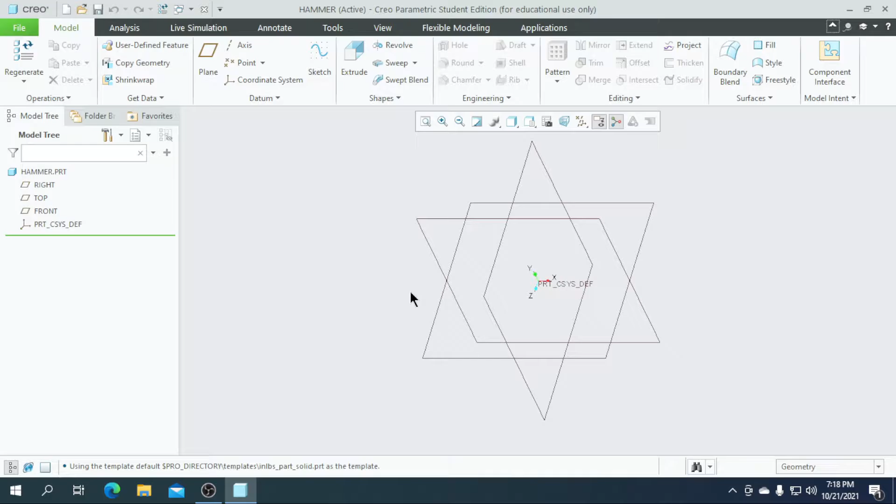So at first select new and enter the file name as hammer. Click OK. So let's go for the front sketch.

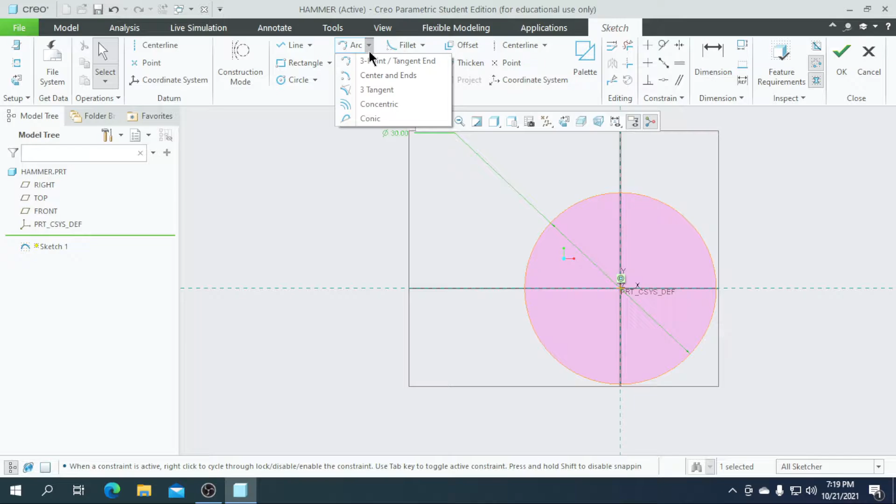At first we need to draw a circle with a diameter of 30. And next we need to draw a 3-point tangent arc from here till here and make it as a tangent.

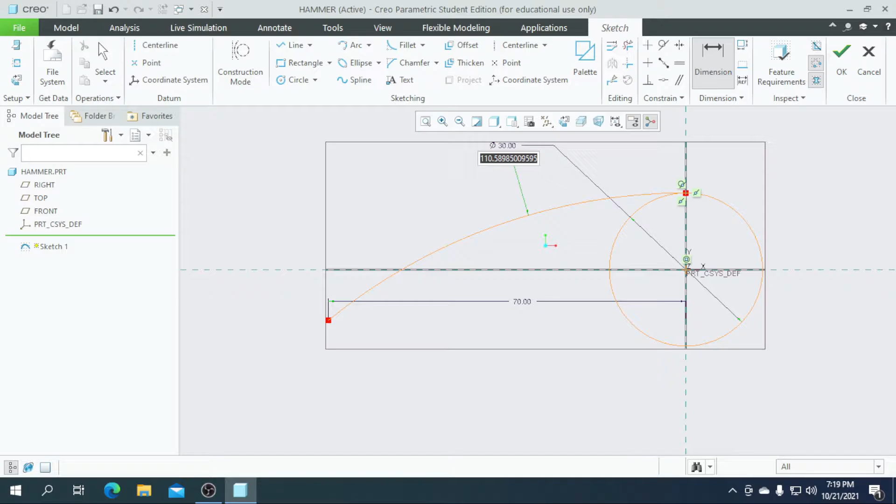Let's go for the dimensions. From this point to this point enter a value of 70. Enter a radius of 189, 185.

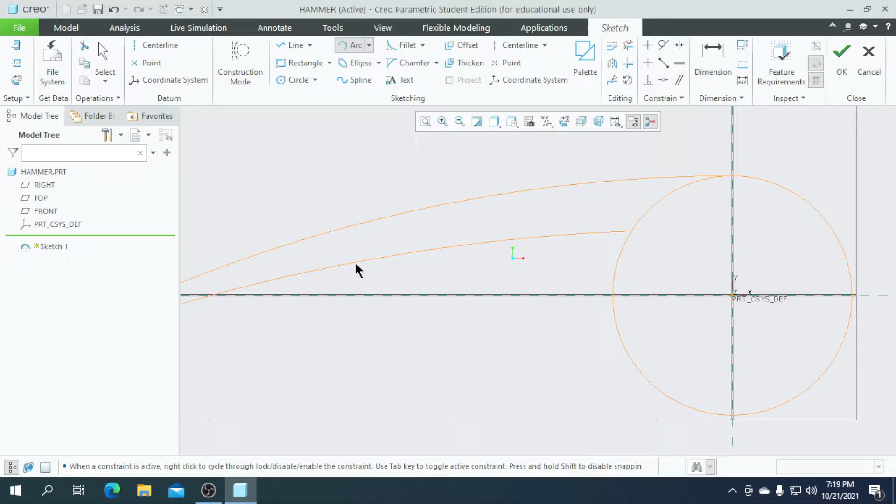So then draw another arc with this reference to this point. Let's go for the dimensions. From this point to this point enter a value of 2, and from this point to this point enter a value of 15.

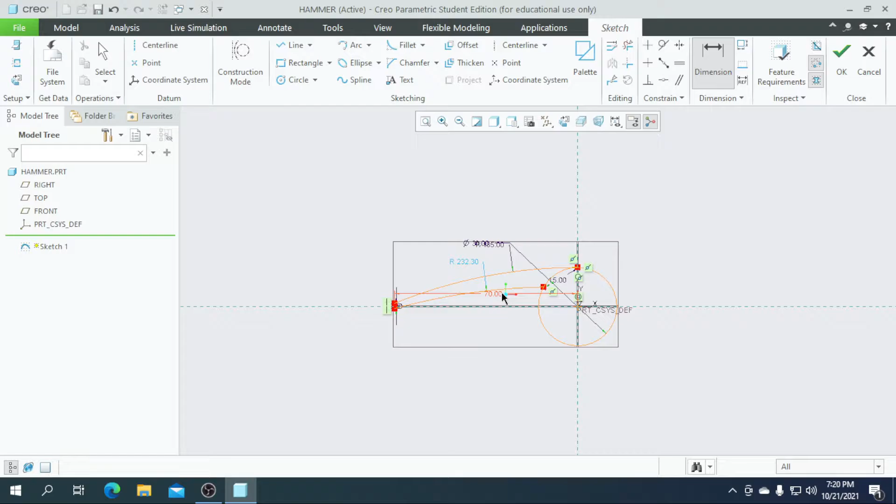So I am drawing this hammer without any dimensions. If you want to draw accurately, you can search for some PDFs. Draw a line. So our part is completed.

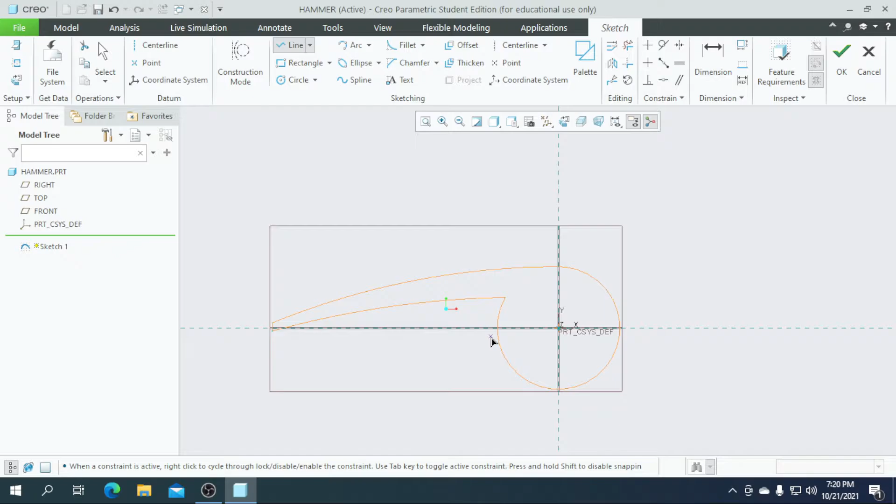Let's extrude this. I am going to extrude this for a value of 30 and click OK. So a single part is completed.

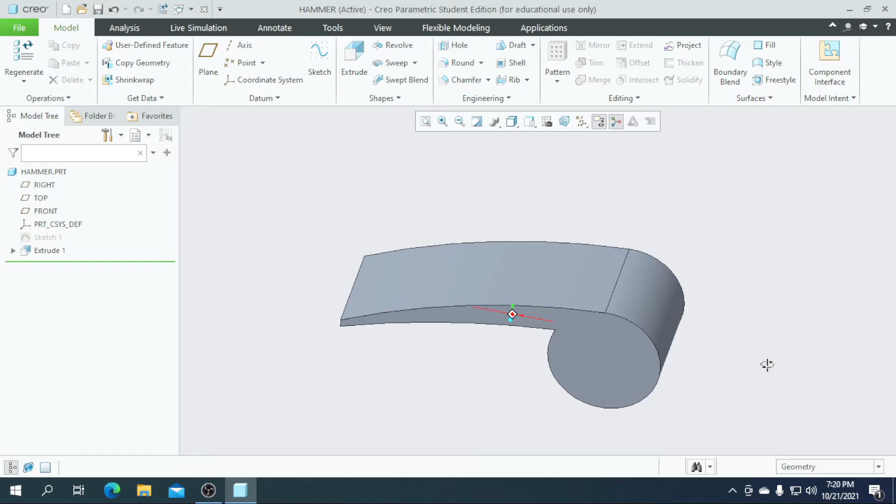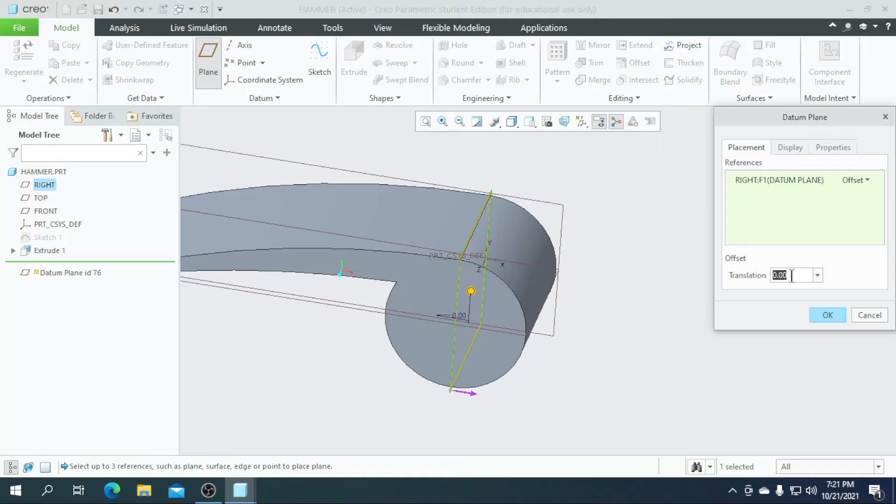So let's create a new plane here. Select plane and click this plane. This is the right plane. So towards the right direction enter a value of 25 and click OK.

Let's click this new sketch. Then draw a line. This line is for just reference to make a center point.

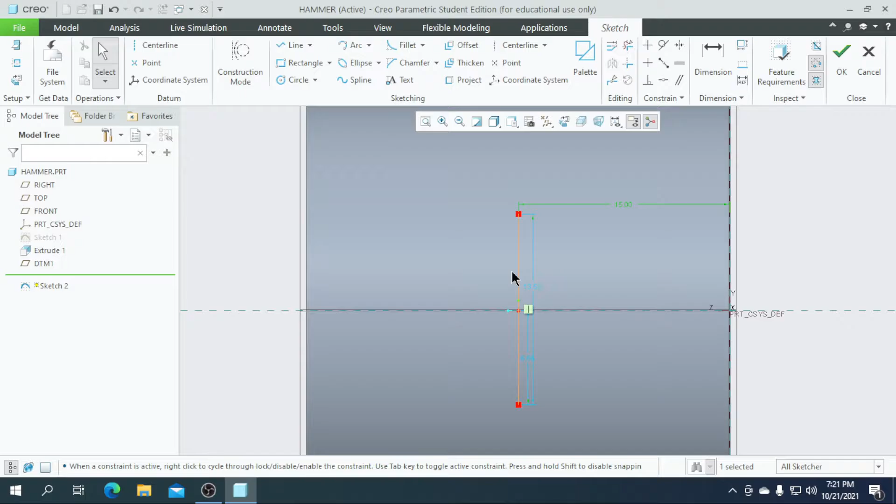Now we need to create a palette, a 6-sided hexagon. Place it somewhere and drag it to this center point and click OK. Now this dimension is of 12.

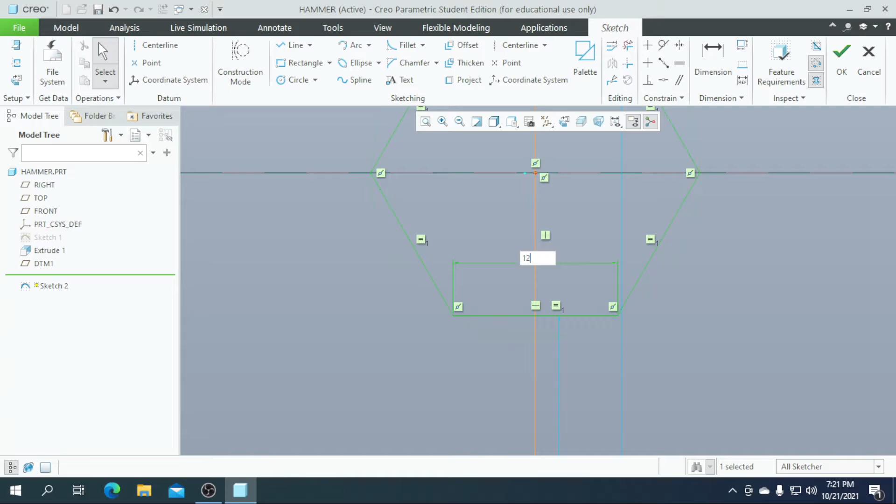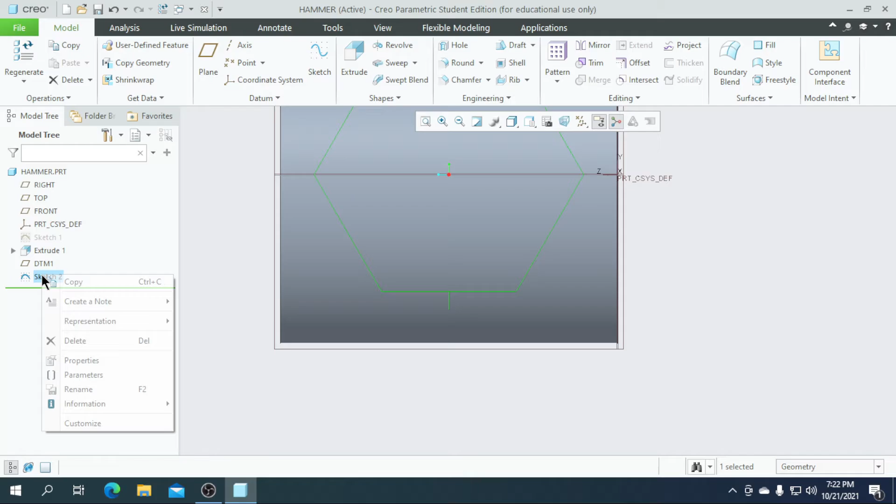Then we need to delete these lines which we created for just reference. Click OK. I think we missed it, so go for this edit. So if we get the select, our section must be in pink color. If it is not, it will show like a red dot, so that we need to delete the segment.

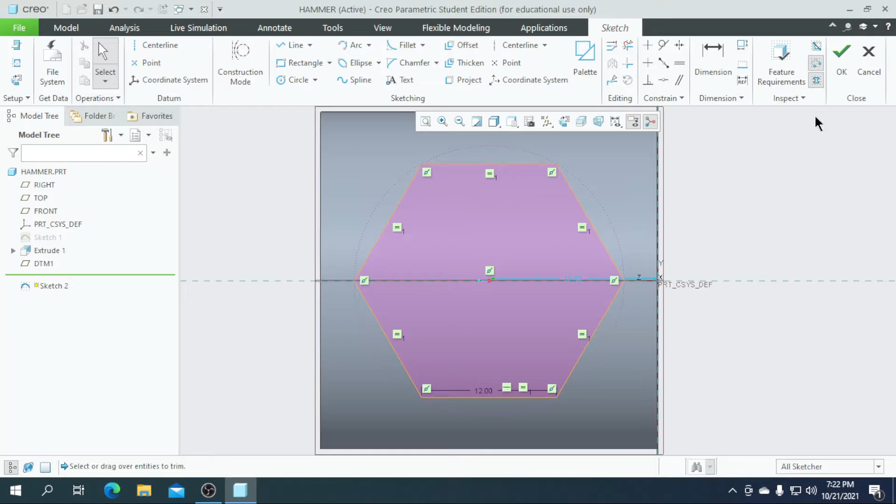Click OK and extrude in this direction, and we are going to extrude this to this surface. So go for depth and click this, extrude up to next surface. So it is extruded correctly, so click OK.

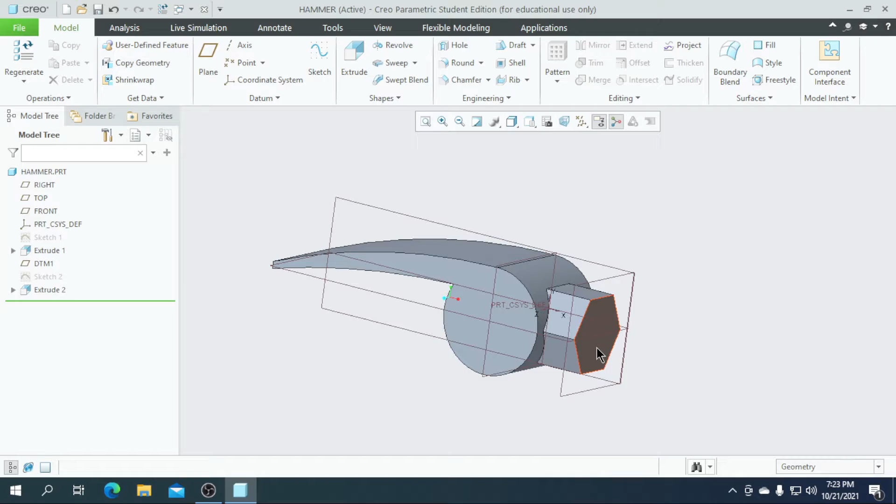So we need to create another part. Click the surface and go for sketch. Let's go for the sketch view, and now we need to draw a circle, so that we need a center line, right?

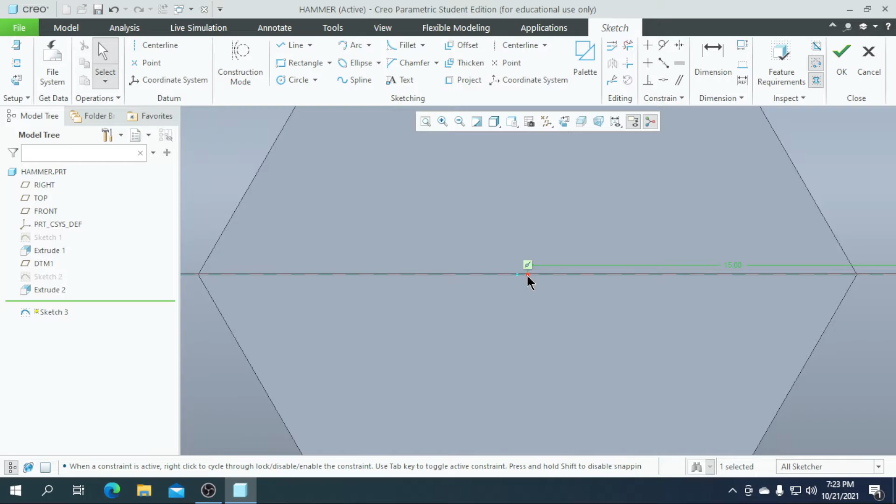So we need to draw a line here and enter a value of 15, or else you can create a point which is easy for you, and enter a value of 15. By creating this point, our extrusion will not be affected, so we don't need to delete all those lines.

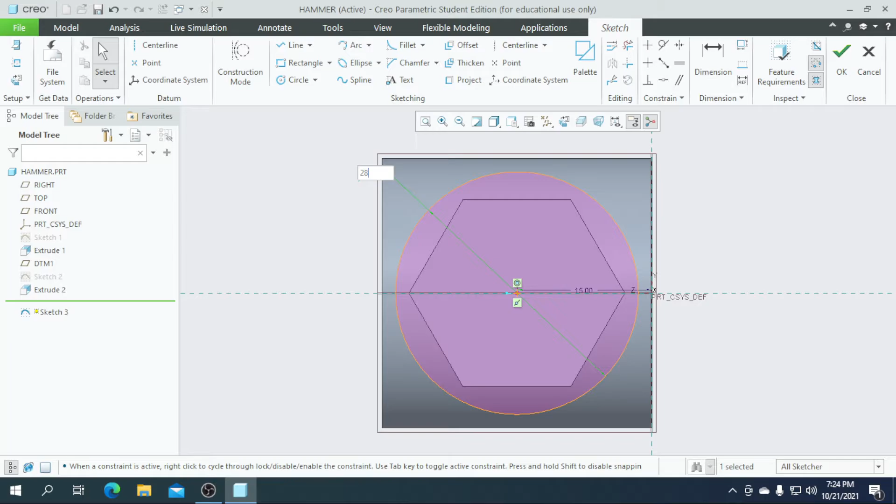So let's draw a circle and enter a value of 27 or 28. Let's extrude it. I'm going to extrude this to a value of 20. So now our part is completed.

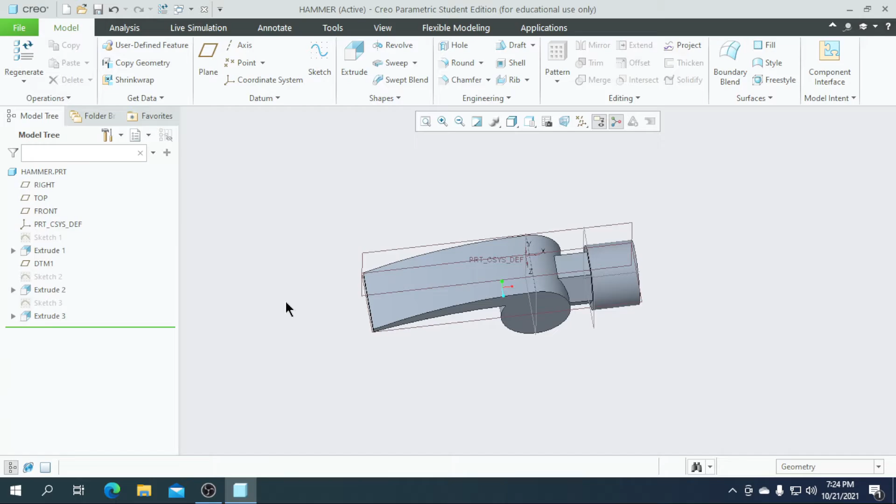So we need to create a hole here and we need to create a rectangle cut here. For that, select this top plane and go for sketch. Let's go for the sketch view.

Here we need to draw a reference line, then close this and create a center rectangle. For this we need to create a corner rectangle to this point, and this dimension is of 4. So this dimension is 15 minus 2, so it's of 13, so it's correct.

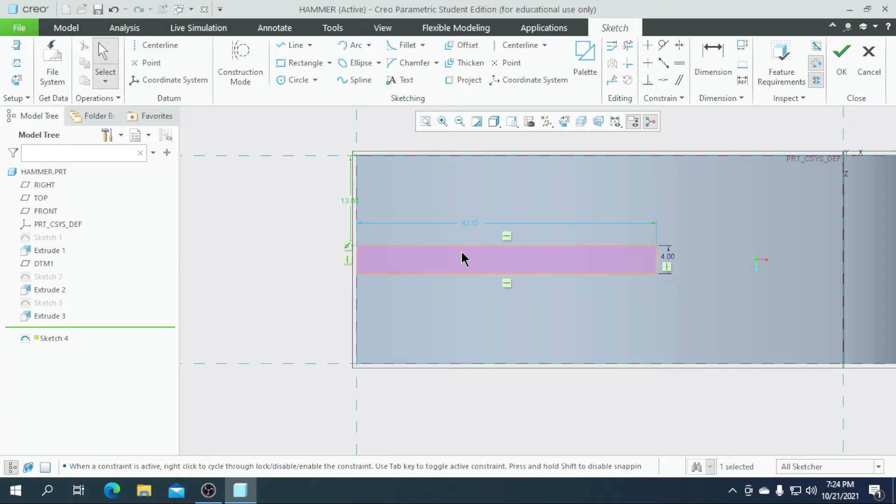And this dimension is of 30, and we need to create a fillet or an arc on this point. So I am selecting a circle with the center point and a tangent circle, and delete the unwanted segments.

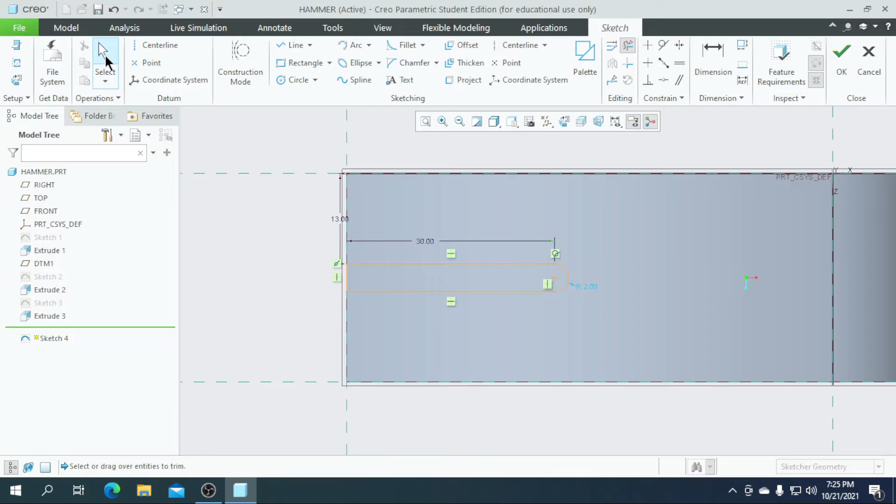So if we create the select point, it must be pink color, so our section is completely successful. Click OK and click extrude, and the depth must be on both sides. Increase this volume, and I am going to remove this material. So our part is completed, click OK.

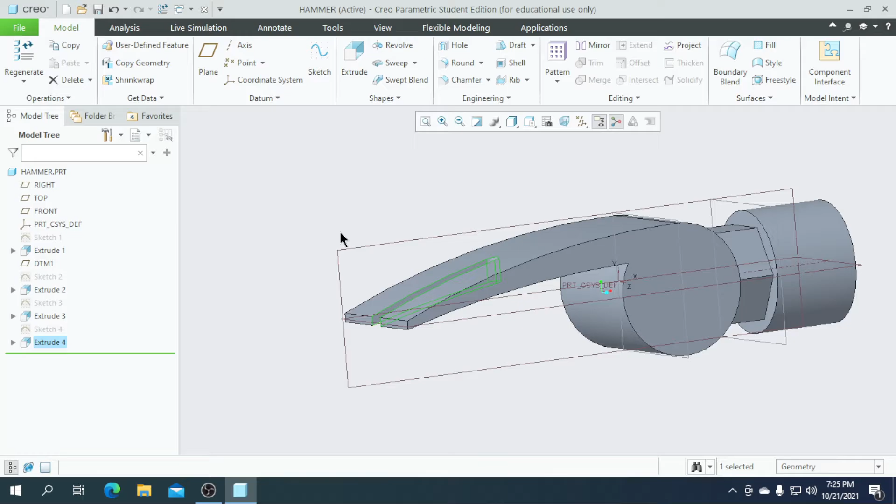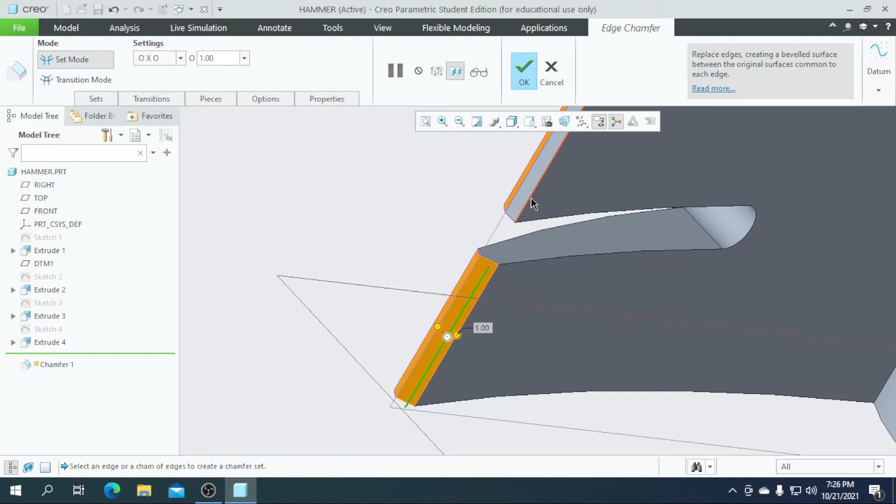If you want these edges to become sharp, you can create a chamfer on that, like clicking this, for a value of 1, and for the bottom, because this part is used to remove nails, so if it is sharp it is easy to remove.

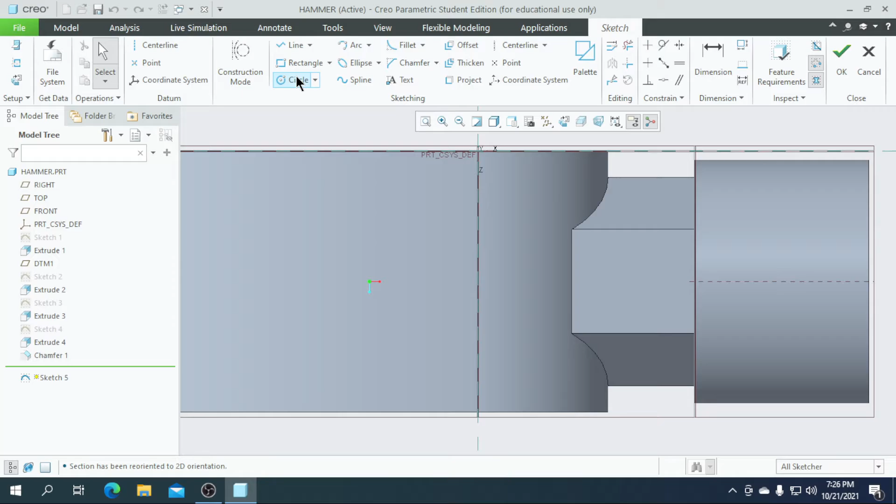So we are creating this chamfer for that, and let's go for the top plane again, sketch and sketch view, and again we need to create a hole to insert the rod.

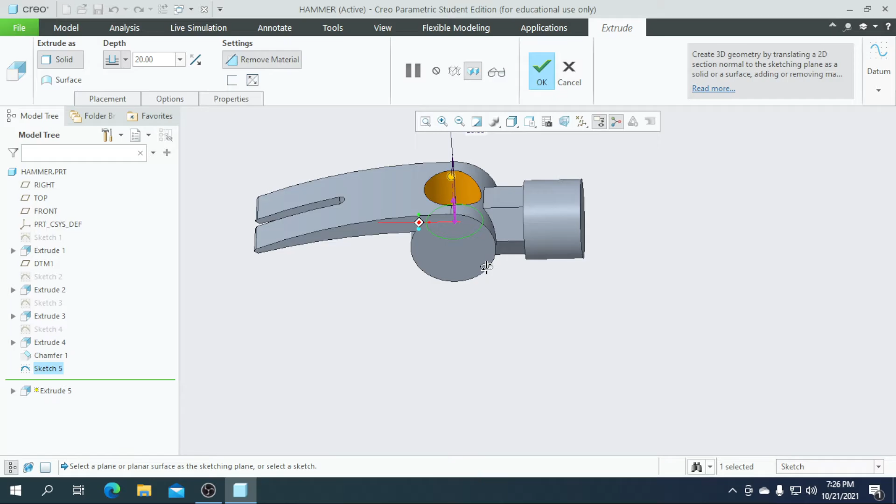So draw a circle and enter a value of 20, and let's extrude it. I am going to extrude this on both sides. So we are going to remove this material and click OK.

So our first part is completed. We need to check for this axis. If there is no axis, we can create an axis to this circle. Okay, I'm going to save this part.

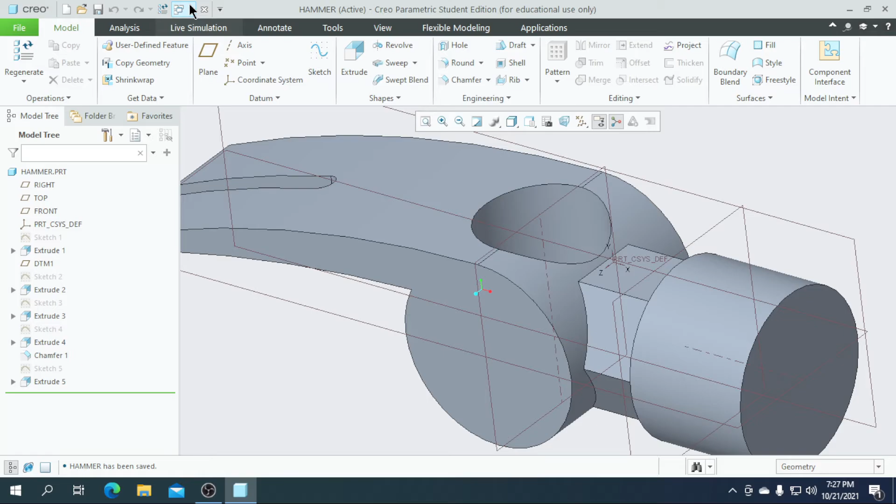So let's create a second part as the connecting rod.

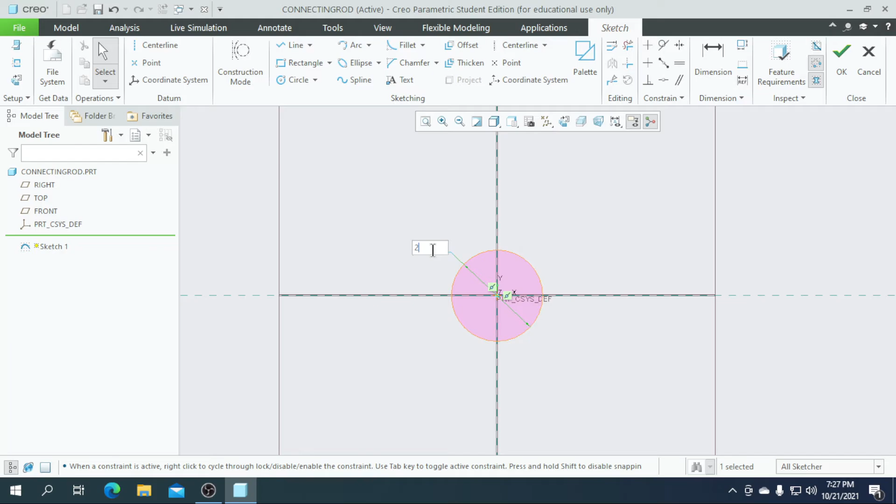So let's go for the front sketch and draw a circle with the value of 20, and I am going to extrude this to a value of 200. This must be the handle, so if you want a longer handle you can increase this value. 200 is the standard value, so I am entering it and click OK.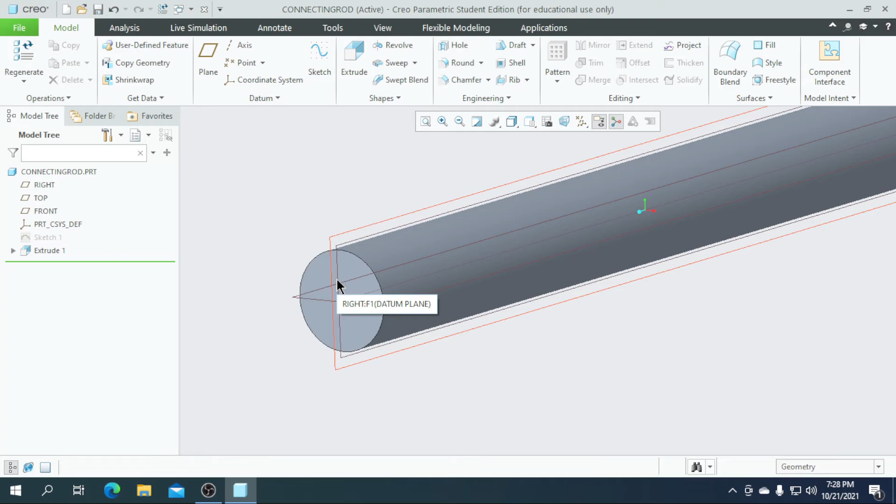So for this also we need an axis. If you are drawing a circle, it will automatically show the axis. So if you are drawing something like a rectangle or a square, for that we need to create an axis. So our second part is completed.

So save this part and let's go for the assembly. So this is the basic assembly. There is no mechanism in this.

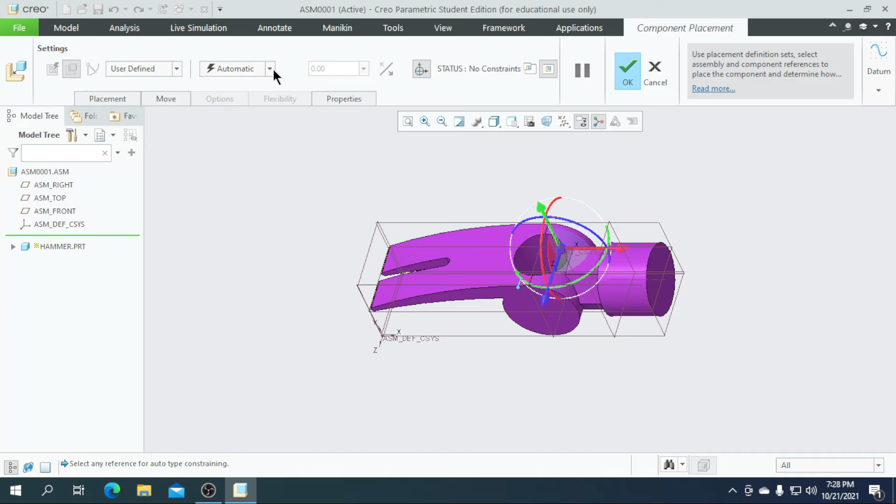So first select this hammer part, and I am going to fix this as default, and then assemble the second part, connecting rod. Rotate this towards the vertical direction, and I am going to select this axis and this axis, and I make them as coincident.

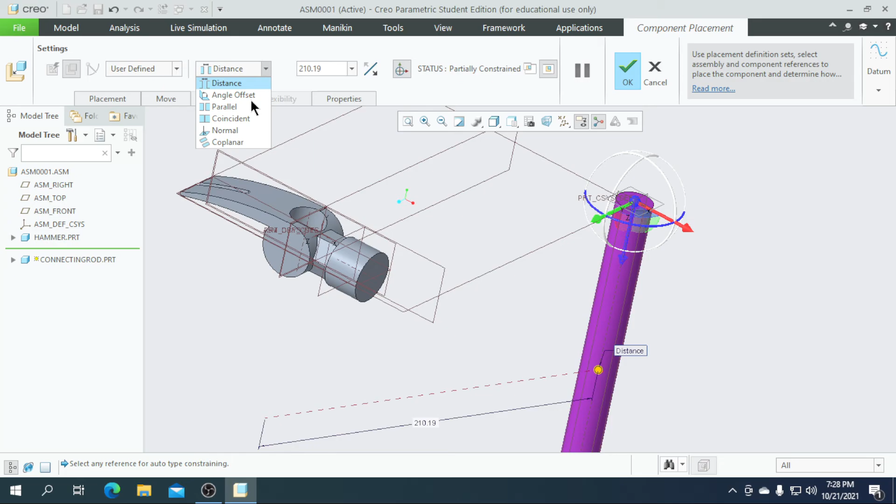So I am going to just drag it like this, and I click OK. So our part is completed.

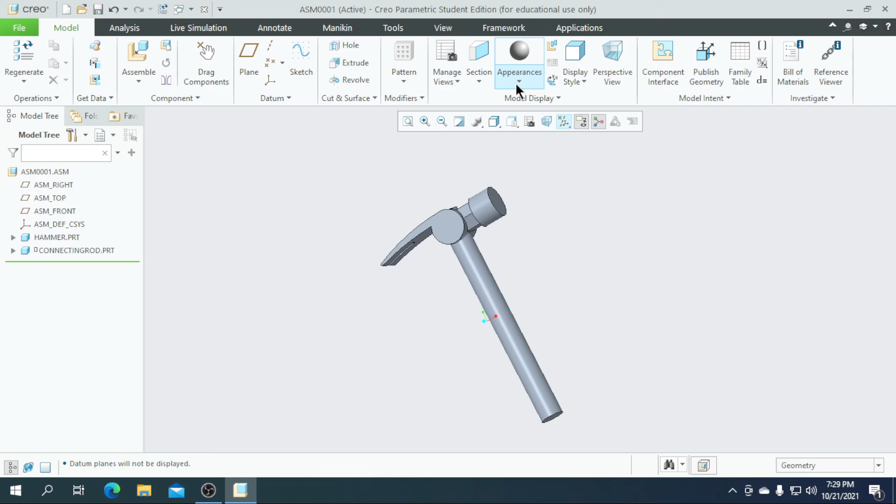So let's give some appearances to this. As this top part is metal, I am going to give metal color. Before that, switch on shading with reflections. So select this metal color and click OK.

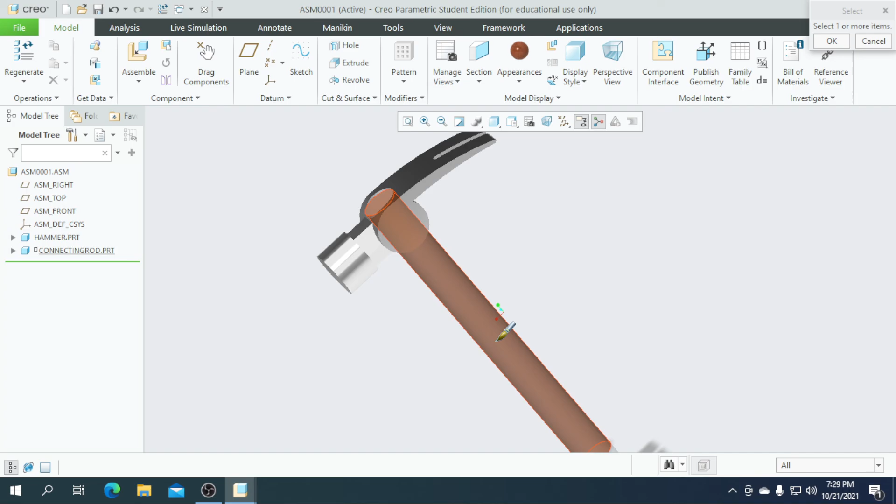So for this bottom, I am going to select the wood color. So the part is finally completed.